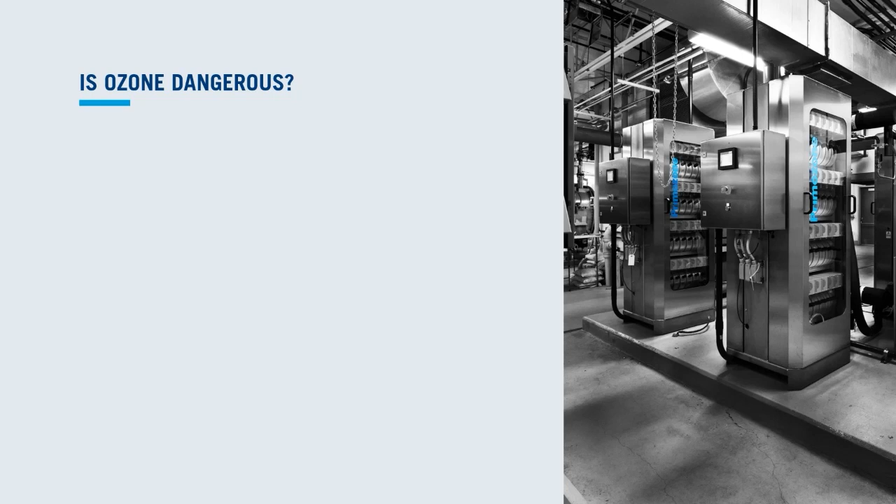Ozone and oxygen are both essential for our survival. For example, the ozone in the atmosphere shields us from the sun's harmful UV light. But ozone, unlike oxygen, is not a gas that we should breathe. It would have a harmful effect on our lungs.

This led to the common misconception of ozone being a very dangerous chemical, while in reality, ozone is not any less safe than other common substances used in the industry.

One clarifying example is perhaps nitrogen. It is used in food packaging, like packed meat and vegetables, to preserve their freshness, protect their nutrients, and prevent microbial growth. Nitrogen cannot be detected by humans, and the nitrogen-enriched environment depletes oxygen. So, if the concentration of nitrogen is too high, the body becomes oxygen deprived before one can even realize what is happening.

That is definitely not the case with ozone, which has such a strong smell that people can detect its presence at a concentration in ambient air that is much, much lower than what would be dangerous. But let's look together at some ozone facts, which will hopefully make us more familiar with this substance.

Ozone is naturally occurring. It is produced, for example, by lightning and by UV light from the sun. A small percentage of the Earth's atmosphere is ozone, and ozone is also part of the stratosphere.

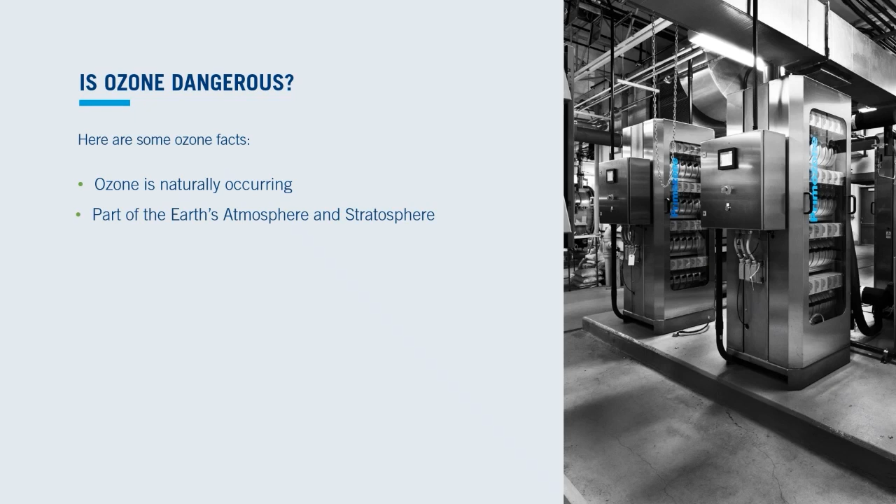FDA rules establish that ozone is generally recognized as safe, meaning it can be used on food products. The safe exposure limit - what a person can safely breathe for 8 hours - is a time-weighted average of 0.1 ppm.

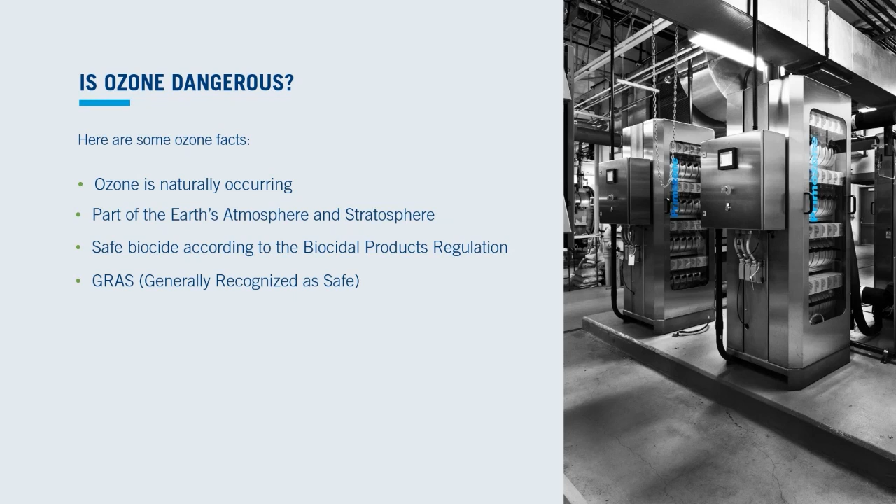Ozone has been used for over a century to treat drinking water, and ozone is dangerous to life or health at 5 parts per million, but most humans can clearly detect ozone already at 0.02 ppm, which is 250 times lower. And finally, the number of people on hospital records that have died from ozone gas is zero.

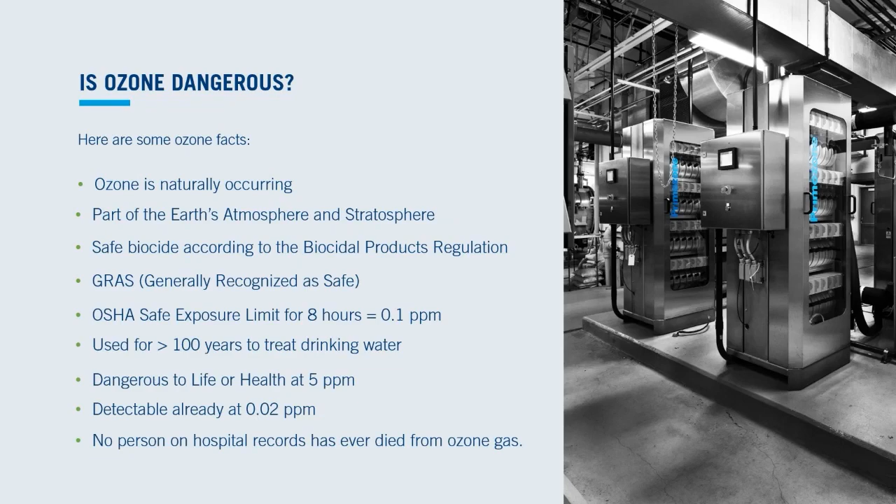Now that we have brushed up our knowledge of ozone, let's go straight to the benefits. Coming next, the benefit of ozone on treatment processes.

Because of its high energy, ozone is extremely powerful. Its oxidation potential, also known as redox potential or ORP, is a measure of the tendency of ozone to acquire electrons, to be reduced, or a measure of its tendency to oxidize, if we see it the other way around from the target compound perspective. Redox potential is measured in volts. The higher its value, the greater the species' affinity for electrons and tendency to oxidize.

As we can see in this list of oxidizing reagents, ozone has the highest oxidation potential after fluorine. The use of fluorine for water treatment is, however, not practical. Therefore, ozone can be considered the most powerful oxidizer available for water treatment applications. One more thing that we can notice in the list, ozone has a 50% higher oxidation potential than chlorine gas, and more than double compared to sodium hypochlorite, which oxidation potential is often used as a reference.

Another characteristic which makes ozone perfect to attack microorganisms and dissolve pollutants is its high solubility in water. Pure ozone is 13 times more soluble than oxygen, but in practice, ozone is not used pure. It is generated and applied as a gas mixture, ozone mixed in oxygen.

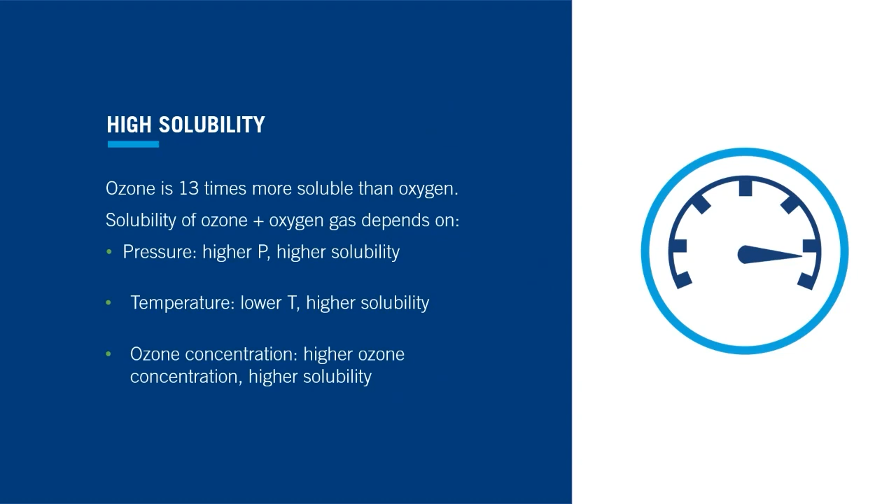Disinfection is defined as a process designed specifically to destroy pathogenic organisms. It kills bacteria, protozoa, cysts, and viruses. Commonly applied disinfectants, such as chlorine, penetrate the cells by diffusion. Within the cell, chlorine affects the microorganism enzymes.

UV light inactivates microorganisms by destroying parts of their DNA, leaving them unable to perform vital functions. Ozone works on a completely different principle. Because of its high oxidation potential, ozone oxidizes the bacterial cell wall. Once ozone has entered the cell, it oxidizes all essential components: enzymes, proteins, DNA, RNA. The cellular membrane is damaged by ozone, so the cell will fall apart, and the damage is permanent.

What does this mean in practice? While microorganisms can become resistant to biocides like chlorine over time, they can never become resistant to ozone. Some can reactivate after inactivation with UV light. There is no such thing as reactivation of pathogens after ozonation.

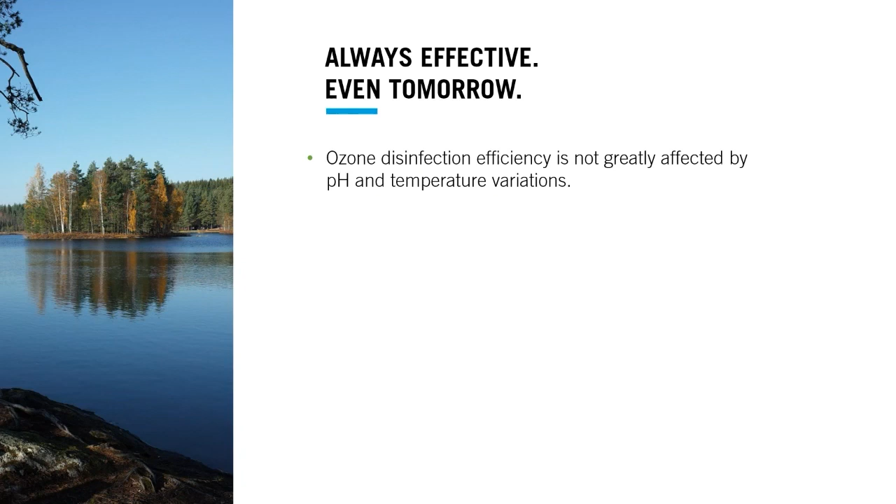Ozone will be always effective. Its disinfection efficiency is not greatly affected by pH and temperature variations. Ozone can provide any level of disinfection with any quality of water and wastewater, while UV, for example, needs good transmittance to be effective. Chlorine, although suitable for the deactivation of bacteria and viruses, cannot be effectively used to deactivate protozoa, while ozone can.

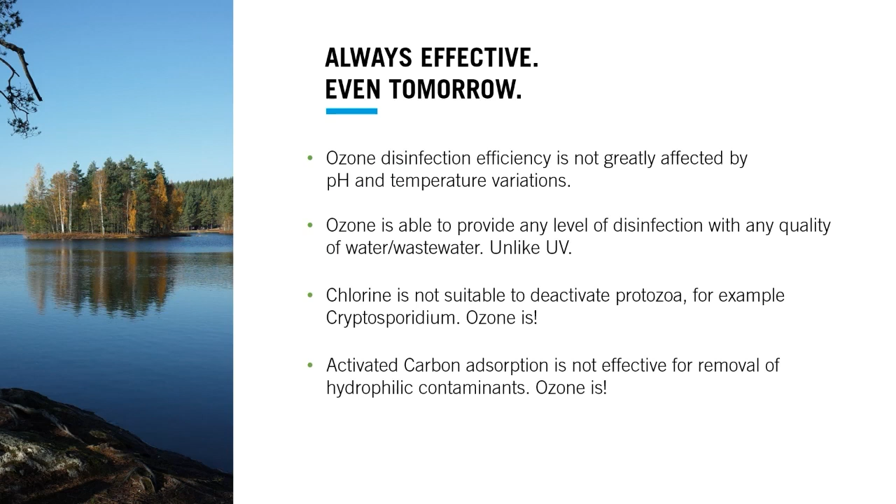Activated carbon adsorption is not an effective method for removal of, for example, 1,4-dioxane, because this contaminant is hydrophilic, which means it has a very high affinity for water, and so it is completely soluble. Ozone can destroy contaminants even if they are completely dissolved in water.

Ozone's broad effectiveness is a great benefit today, but it will be an even greater one tomorrow. Ozone is the only disinfectant which also breaks down contaminants of emerging concern. So installing an ozone disinfection system today will comply with the strict upcoming rules for removal of these contaminants. A different system will have to be replaced to comply with the same rules.

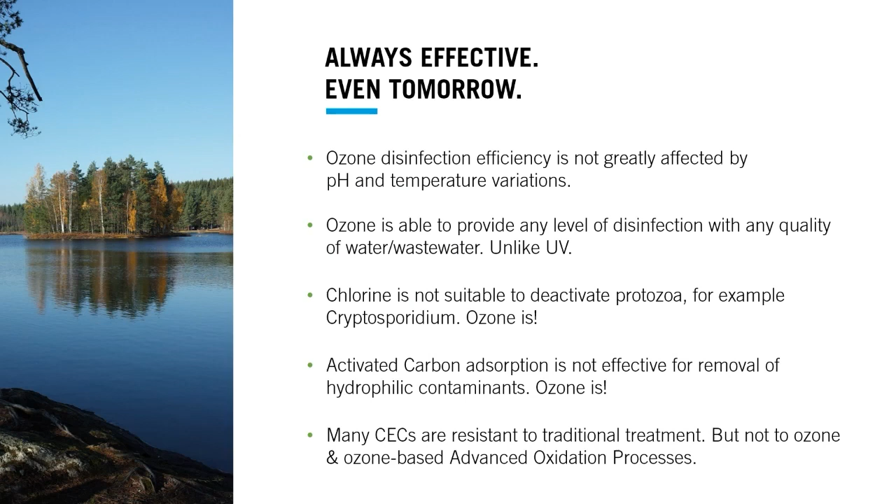Being a highly reactive oxidant, ozone has many different applications. In a drinking water treatment plant, it can be used for disinfection or applied earlier in the process to reduce disinfection byproducts. It can deal with taste and odor issues in surface water and groundwater, breaking down odor-generating compounds like hydrogen sulfide. Applied as a preoxidant, it can remove iron and manganese, and so on.

There are also many possibilities to apply ozone in a wastewater treatment plant: disinfection, color removal, odor control, COD reduction, and removal of pharmaceutical residues prior to discharge, to prevent contamination of receiving surface waters with pollutants that might affect marine life or reach the intake of a drinking water plant. There are also ozone applications for sludge conditioning and in the fast-growing sector of water reuse.

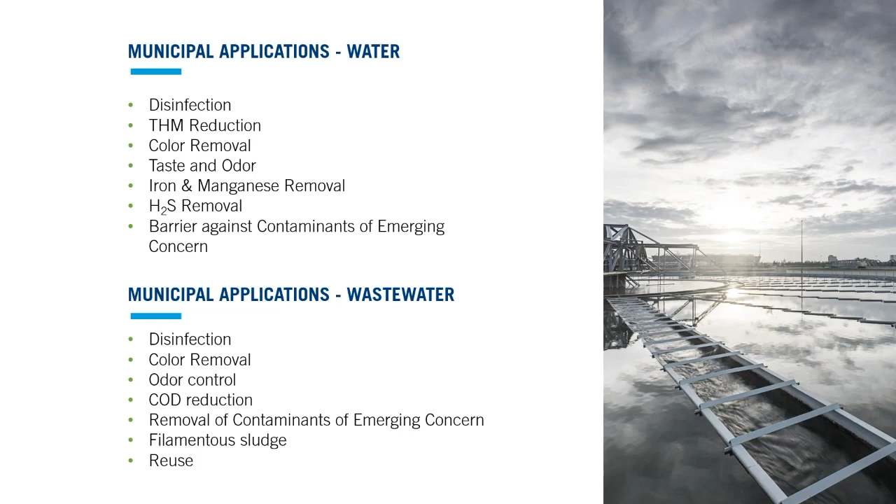The range of industrial applications of ozone is even wider. We have, for example, treatment of ballast water to prevent contamination of the marine environment where ballast water is discharged with different species or contaminants loaded up elsewhere. We have cooling tower applications and applications in the oil and gas sector. Ozonated water can be used for bottle rinsing and filling, or on crops and fruits to extend their shelf life and protect them from parasites.

Ozone can be used to bleach pulp and textile, but also to remove color from the wastewater of paper mills and textile factories. With these and many more applications, ozone proves itself extremely versatile, bringing benefits to a number of sectors.

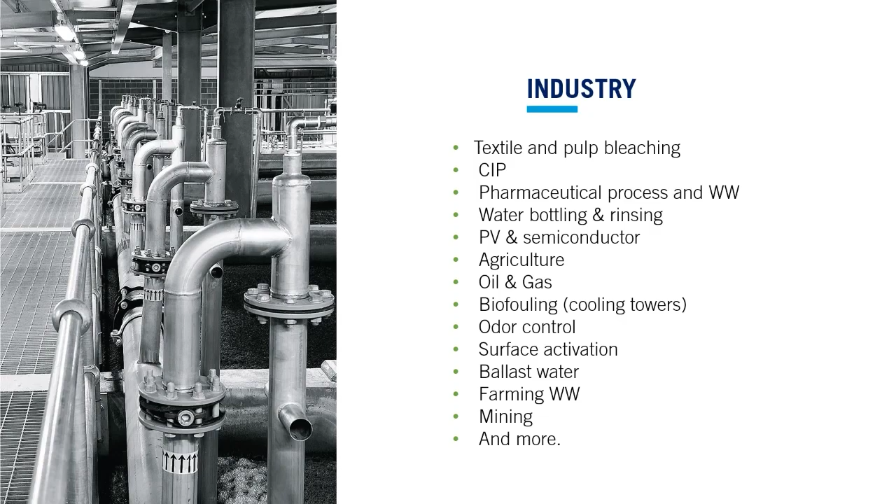The benefits of ozone in the aquaculture sector are outstanding. Ozone is often used in recirculating aquaculture systems to keep the water clean and to limit the amount of makeup water needed for the fish farm operation. Using ozone for this purpose also leads to an increase in the dissolved oxygen content of the water and to a general water quality improvement, which has a positive effect on fish health and growth. Consequently, the productivity of the fish farm increases, not only in number but also in each fish's slaughter weight.

Ozone is also used to disinfect the intake water of fish farms to prevent the spread of diseases, which could make the farm lose an entire batch of production. The positive effects of ozone can be detected even in the final product, as ozone can remove from the recirculating water compounds which might give a characteristic off flavor to the meat of farmed fish.

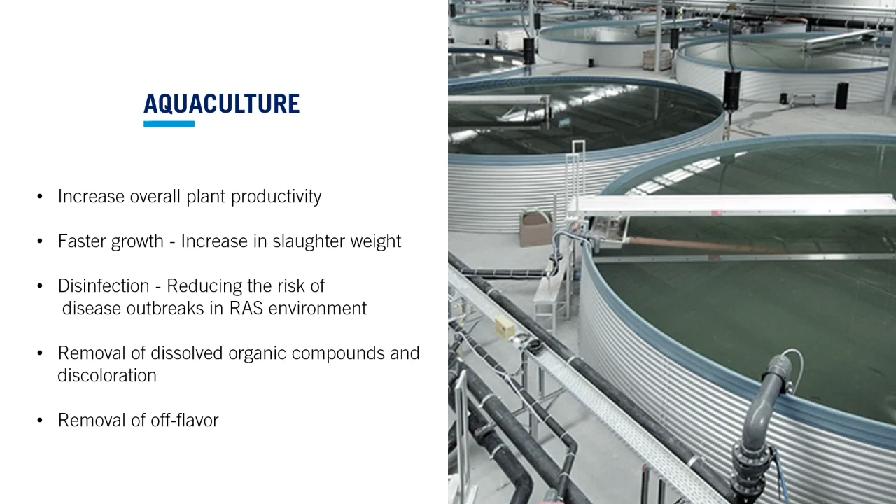Ozone can bring benefits to industrial processes which one would not expect. Here we would like to share some of the most promising and interesting effects of ozone in different industrial sectors. The first is surface activation. Ozone can make surfaces which would normally repel each other stick together. This is beneficial for the food packaging industry, in the process step where different layers of multi-layered food packaging are glued together. Ozone will make these layers stick together quicker and increase the productivity of the food packaging production plant.

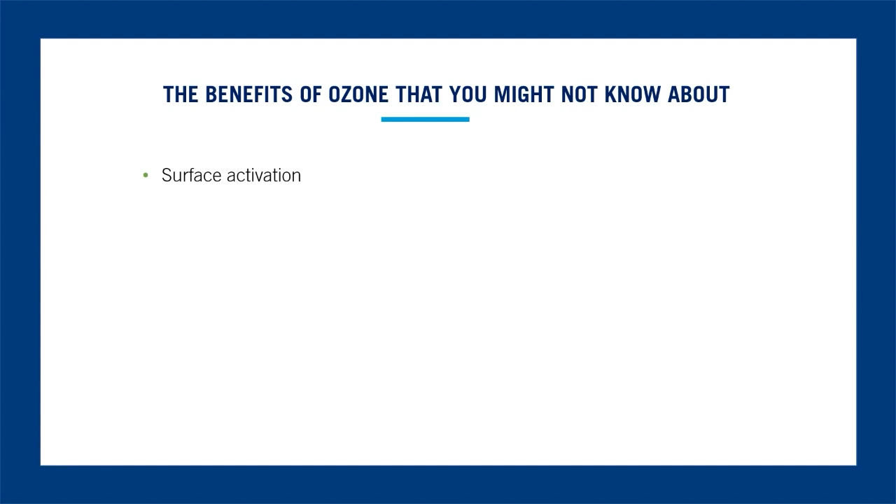We have an example of that in our closest vicinity, in the city of Lund. In the process of production of solar wafers, there is a cleaning step in which heavily ozonated water can be used to get rid of chemical residuals. This step increases the efficiency of the solar wafers. Primozone has over 100 installations for this application, but it should be noted that due to the very high dissolved ozone concentrations involved, the ozone must be produced at the highest concentrations for this to be feasible.

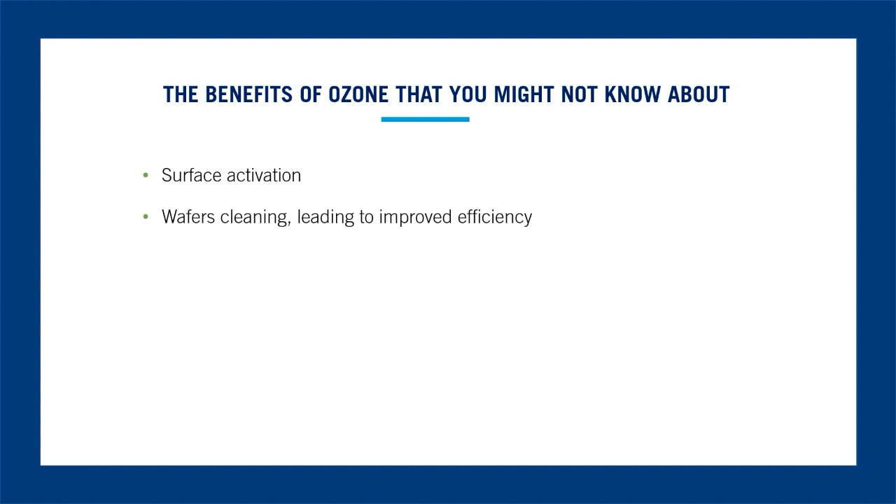Ozone can be used not only in water, but also in air. If ozone is injected in the exhaust of, for example, a restaurant, it can break down grease and prevent its accumulation in the exhaust ducts. This will avoid the energy required for ventilation increasing over time because of grease buildup. And most importantly, it will eliminate a fire hazard.

We have then textile bleaching. Everybody knows the effect that bleach has on clothing. What you might not know is that ozone can also obtain the stone wash effect on jeans. This can be done by special industrial washing machines made to obtain this nice design without the use of polluting chemicals. Primozone is proudly part of many of these environmentally friendly systems for jeans bleaching installed worldwide.

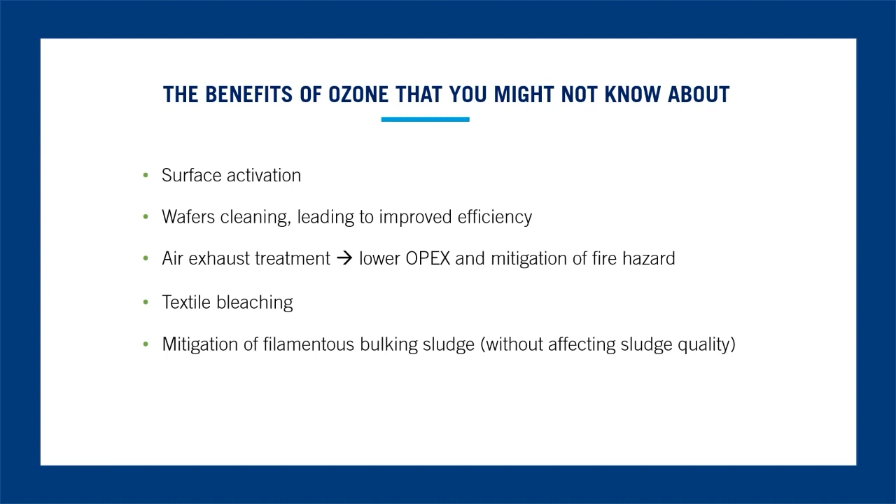Filamentous bulking sludge is a well-known problem at wastewater treatment plants. Filamentous bacteria grow on the sludge surface and prevent its settling. Normally, ozone wouldn't be considered a suitable solution, as it is a very powerful, non-selective oxidant, so the concern would be that ozone kills all microorganisms in the sludge, including the good bacteria. Surprisingly, ozone has been proven to selectively break down the filamentous bacteria first, so a small seasonal ozone dosage can improve settling of the sludge without affecting its quality.

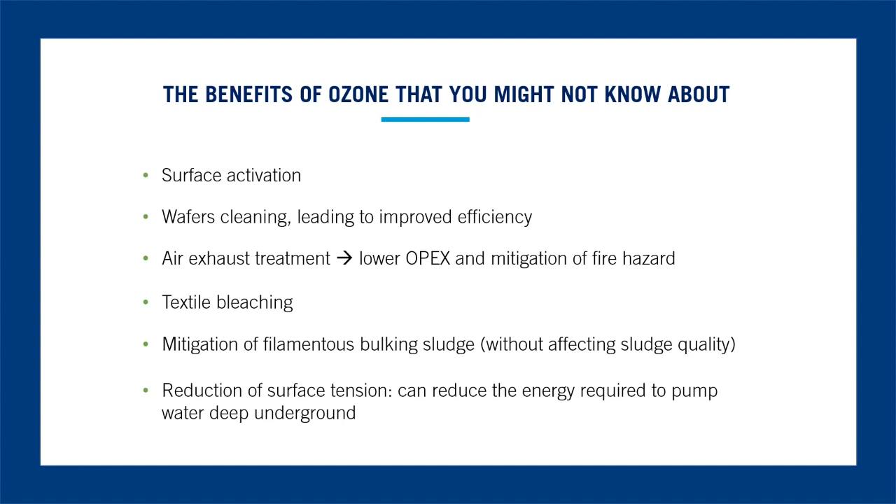And finally, reduction of surface tension. Ozone can reduce the energy required to pump water deep underground, a benefit, for example, in oil and gas applications.